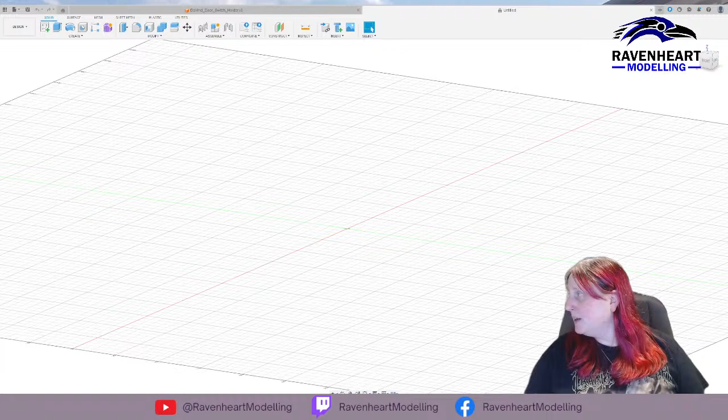What I'm going to do, let me just move a couple of things around on here so I can actually see what's going on. Okay, so yeah, I'm just looking at screen comments and stuff over there, so it's all good.

What I'm going to do is start off by making a drawing. Would help if I use the right controls for the right program. So I'm going to create a sketch on the top axis, and I'm going to start off with drawing basically the outline of this. I've got this set to millimeters, which is helpful.

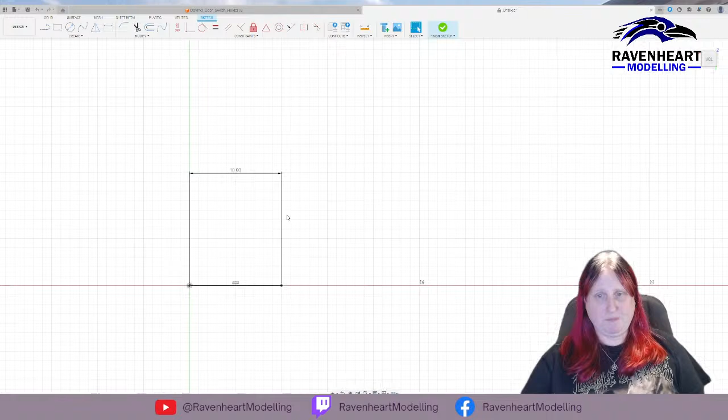So I'm going to start off by doing 10 millimeters that way. So that's that. In fact, I need to - yes, because I'm using this, of course. So I'll go 10 millimeters that way, and then I'm going to go 8 millimeters this way, and then another 15 mil. Okay, and then I'm going to do 20 mil up here.

So this line here is the outline. I'm going to make it 3 mil width. So we go - let's have a look, so we've got 15 mil, it's 2 mil plus that, I'm just double checking my maths. Okay, let's do that, so that will take it out to where it needs to be. Then we've got 15 plus 5 in there. In fact, I need to move this out, don't I? So I'm going to need to move this.

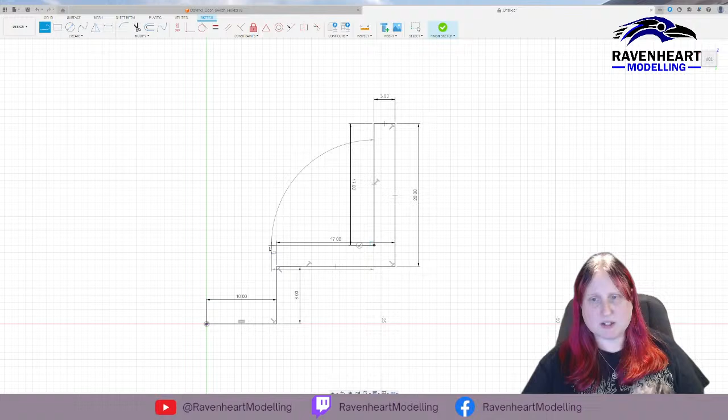There we go, cool. So then I'll bring it out by 3, and then I'll bring that down. That's 20 minus 3, which is 17. And then across here, I'll bring it, so that's going to be 17 as well. And then down here.

Yeah, sorry, didn't I? This is where you get to see all of my mistakes, all my little mistakes going on. So, undo that, undo that, undo that. Okay.

So, need to go this way at 3 now. And then go down here. What is it? No, it's... yeah, no, I know where it is. I had it right the first time.

Right, put that one back in. Have fun, I'll get this right in a minute. So 3 mil this way. I need 17 this way, and then this goes to the end, all 24. Then this goes back down to the bottom.

So that should be 8 plus 3. The 8 plus 3 is the 8 that we're going in plus 3 mil of depth, which we've got all the way around. Okay, that should be okay. So that is for one side.

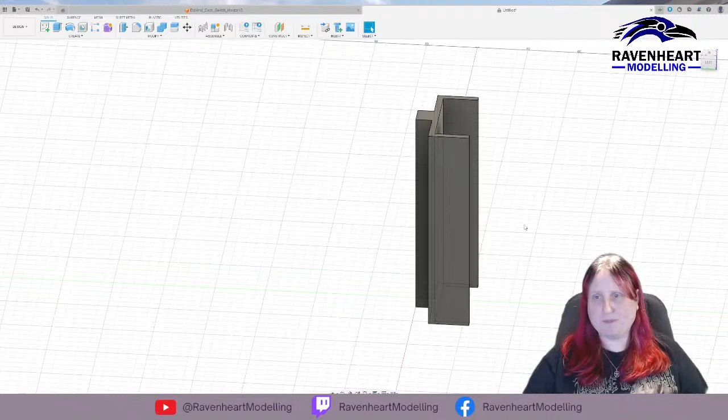And so with this, I'm going to finish this sketch now. I'm going to be able to select both of those and actually extrude them by, let's call it 100 mil. So we've got this now. Actually, 100 is probably a bit too much, let's call it a bit 50 mil.

Okay, so what we've got now is this little thing here that sits in the groove of the trestle at the top, so it sits in a little V. I didn't make it a little V shape because I can so easily get that wrong, and it'll just sit there quite nicely anyway, like this.

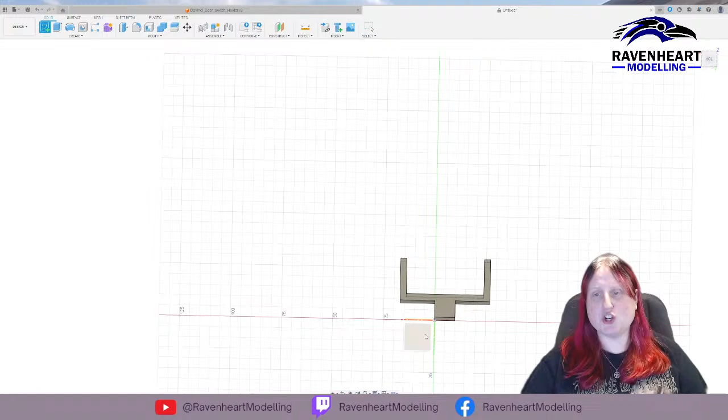So what I've got to do now is, bearing in mind that this is 3 mil thick, I need to create another drawing, another sketch on the same plane. And I need to make this one, because this is the one that's going to go on the side, on the end of the boards, so sort of the end trestles.

I need to take this up by 8, and then I need to take it out by 3. Then I need to take it up by 20. Okay, then I need to take it, yeah, so take it across by 3 and then down by 17.

And then across by 22, and then up by 17, over by 3. Which stopped doing it, there we go. And then we go down by 20, and we go down by 20, and back in there.

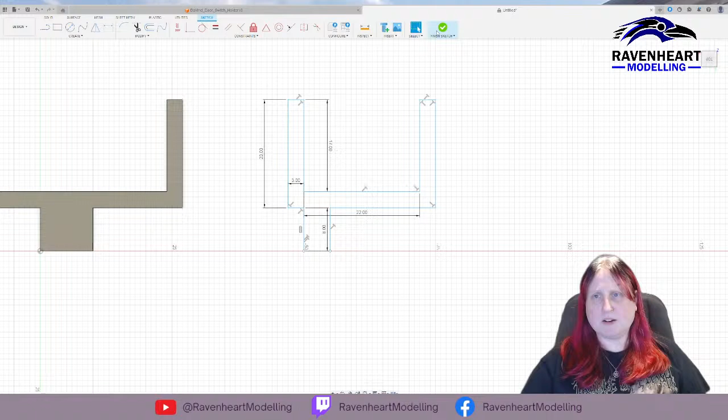That is just a little bit too fast. Right, so this now, if we finish this sketch here, that's now - did we not go across the bottom? We didn't, okay, so just create the one at the bottom, across there. There we go. Finish sketch. Okay, so this sketch now, I'm going to extrude this as well.

I'm going to extrude it by 50. So we've now got both of these built.

What I'm going to do now is, if I look at the left-hand side, I need to create another sketch on this plane, and I'll need to do it about halfway. So I need to create screw holes in these.

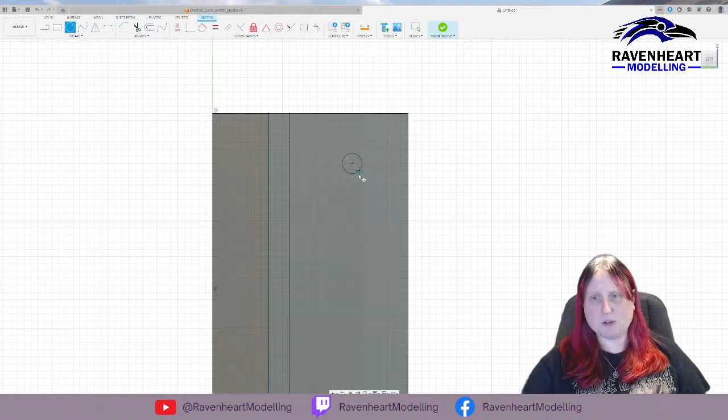I think I'm going to be using M4s. I'm going to create a 4 mil hole here, and I'm going to create another 4 mil hole in the same axis, at 1.5 in. It's there. And I'm going to do 4 mil.

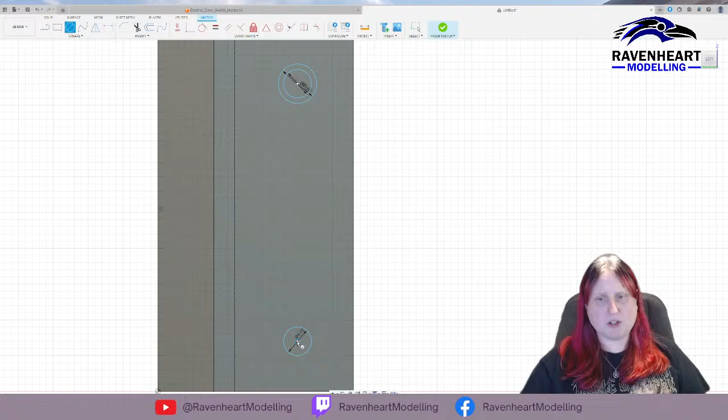Now what I'm going to do as well is create a 5.5 mil circle around each one of those, and we are going to use that to create the countersink.

So first thing we'll do is take this, and we are going to extrude. Finish the sketch, of course, first. We're going to extrude that by minus 200.

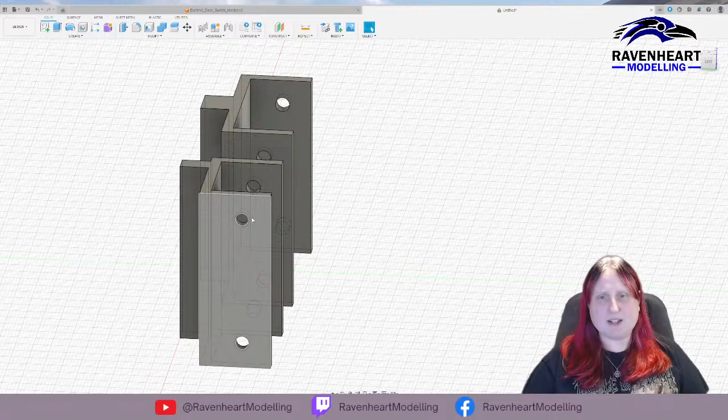So the way that's done now is that's taken holes all the way through, in exactly the same place on every single piece. So what I'm going to do now is go back to this sketch.

Sketch 3, I'm going to unhide that. And I'm going to move that sketch. In fact, no, I'm not going to move the sketch. I'm going to highlight, zoom in a bit, highlight in there, highlight on there.

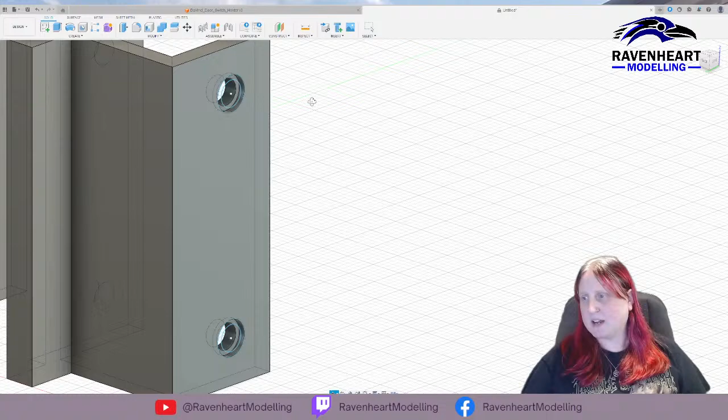And I'm going to do the same, extrude, but only by a very, very small amount. So -1, which is a third of the way through. If I look, yeah, so that's a third of the way through. If I do that now, you'll see that I've now got this countersunk screw head in there, which I can use.

So now I'm going to take this sketch 3, I'm going to move it, and move it over to here, so it's on that plane. In fact, I'll move it back a second. I'm going to move all of sketch 3... I can't move all of sketch 3. That's a shame. And move that and that. So move it. There we go, so we're going to move it over to there.

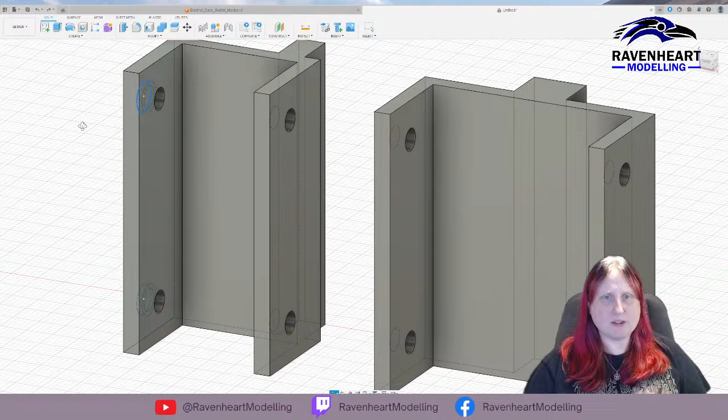Ooh, of course, yes, because it's all linked, isn't it? Right, okay, so I'm going to need to create... I'm going to create a copy. No, that's not going to work either. Aha, this is where I've faced my challenges, you see. So am I going to have to create a new one on each one? Probably. All right, so I'm going to have to do that, I think.

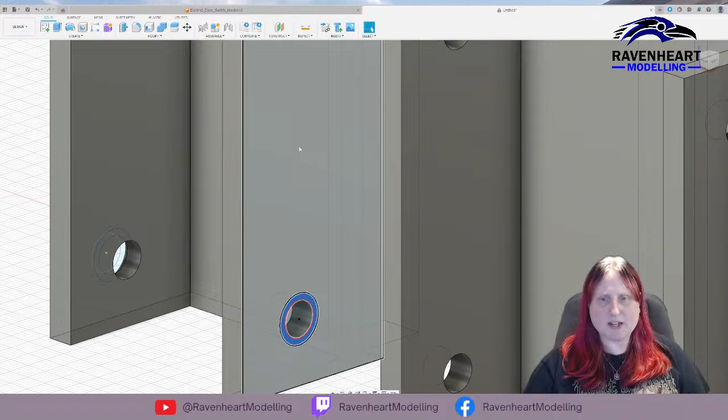So I'm going to do the same. I'm going to do 5.5. I'm going to do 5.5. Okay, finish that sketch. So now I should be able to select that and select that, do an extrude of -1. There we go. Now we've got, yeah, perfect. So we've got those on each face.

So it's sad that I couldn't reuse that sketch on the other side, but never mind, it's there and working now. So I'm gonna have to do the same here. So I'll do that, and do a sketch there out to 5.5, and another sketch out of here to 5.5.

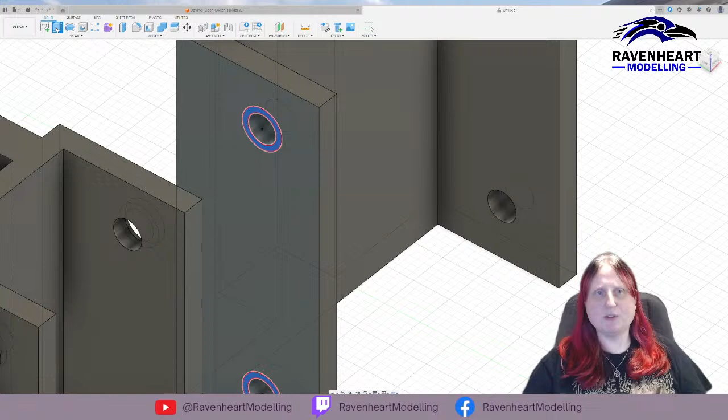Okay, finish that sketch. And we're going to go in there and into there. We're going to extrude that by -1. And the same on the last one.

We're going to create that sketch there. We are going to then create circle, 5.5, and another circle down here of 5.5 now. Finish that sketch, and then you'll be able to select that and select that. Extrude it by -1, and that is that.

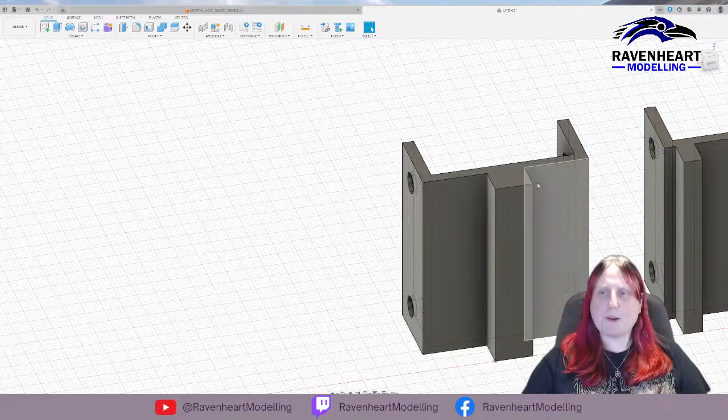So now we've got these. Let's see, that should be fine, that should take us... These are 2 different widths. Why are these 2 different widths? Let's measure them. Do that corner to that corner.

Length... length... 10 mil. 10 mil, okay, so this is what? How big is this? I might need to make this a bit bigger. That's 5 mil. I've made a mistake. I have made a mistake.

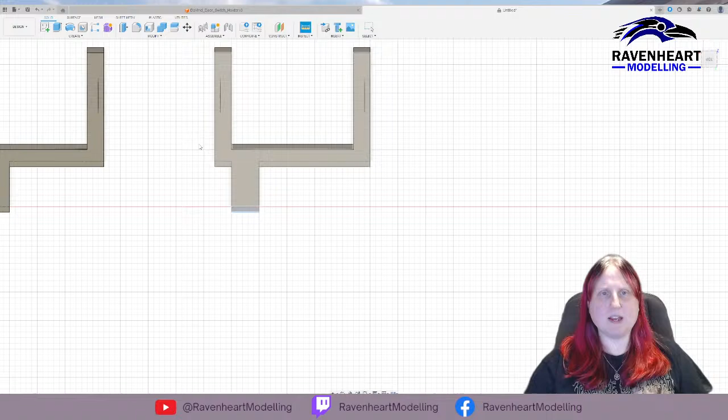Okay, so yes, what I need to do now then is create a new sketch. It needs to be on this side. And what I'll do is create it here. We'll do it up by 5 by 8. There we go, finish that sketch. Extrude it out by 50.

And that's additive, so that adds on to there. So that's that mistake easily fixed. Oops, I'm upside down now. Yeah, so these look fairly good.

One thing I will do is just chamfer these corners slightly to make them a little bit neater. Chamfer them by 2 mil, I think. Yeah, 2 mil, there we go. So those are a bit neater.

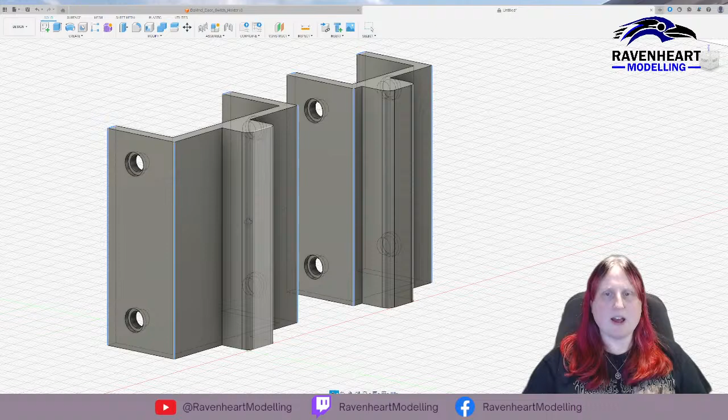The insides need to be as neat as possible. What I'm going to do is... no, not you, you. You and you, you and you, and then underneath I'm going to do you, and I'm going to chamfer you by 1 mil, just to make it.

Oh, hang on, where have you chamfered? I had something selected then that I shouldn't have done. Okay, let's have a look. Let's do this again, I'm going to do it bit by bit. So you and you. Sorry guys, you're going to get a little bit annoyed with me doing this, I think. Let's do it bit by bit, 1 mil chamfer on there.

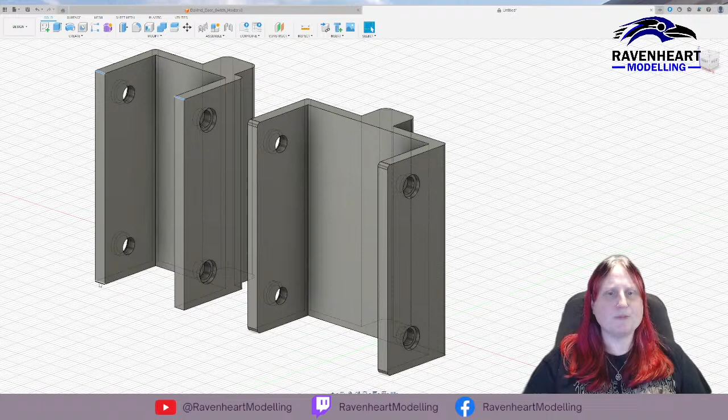2, 3, 4, chamfer by 1 mil. And 2, 1, 2, 3, and 4, do a chamfer of 1 mil on there. Okay, there we go, so that should be fairly good.

That's what I'm going to do now, is I'm going to save that. Save it in my admin project, Trestle support. Okay, I'm going to save that.

So what I'm now going to do is select these bodies in here, save them as a mesh, and export them out. You can't actually see this, which is frustrating, but I'm going to export these out into my file system. I'm going to go to 3D printing and create a new folder, because I'm going to be doing a load of 3D prints from this channel, so it's going to be good. And so, supports.

So this is a double support. And save that one out. Okay, and that's saved. And then this body here, which is that one, I'll save this one as a mesh as well.

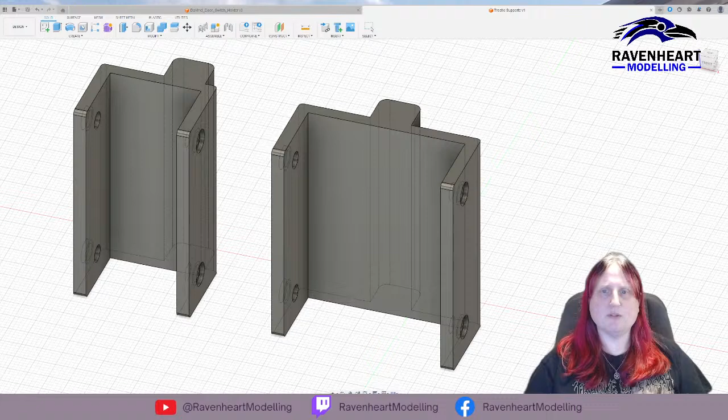And we will save that out. And the other one didn't save, okay. Well, I'll go back to this one and save this one again because it didn't save the first time. All right, and we'll call it double supports, and we'll save that and click save. Okay, so those are all saved.

Now my next challenge is going to be that I need to get these printing. So I'm going to bring in my 3D printing software. I have a DaVinci Pro 3-in-1 version 1.0 printer by XYZ Printing.

Sadly, XYZ Printing have just gone out of business. So I'm using this printer as long as I can, and I will need a new printer at some point. So I will be starting up a Patreon or something like that, just to help me get towards these things, help me build the layout, help me build a new 3D printer.

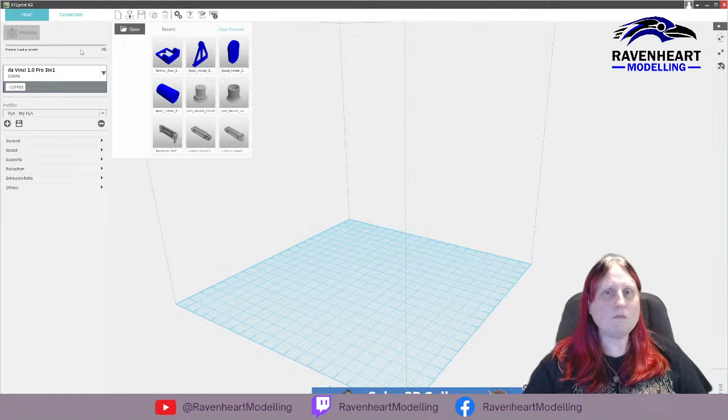So I'm going to load up the double support first. Okay, that's in there. And I'm going to open up single supports.

At the same time, I'm going to only print one of each at this point, and that is because I don't want the issues of printing multiple and then ending up... what is that? Okay, and then ending up none of them fit. So this is basically one of each, proof of concept, and then when they both work, which I'm sure they will do, I will print the rest of them up.

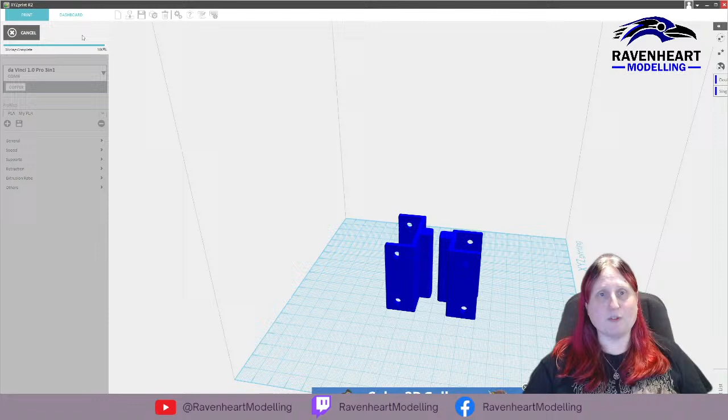So if I check supports on this, I've got supports and bases enabled, so that should be fine. I'm using PLA. So if I prepare this for printing... no printer connected. I want to be using that printer then, please. So these are...

Yeah, so here we have, it's all sliced up. We can see it by layer, go down layer control, and go. So yeah, we've got all the supports in there as well. So let's have a look and see how that prints. So that should be 1 hour, 29 minutes to be printing. So we shall see.

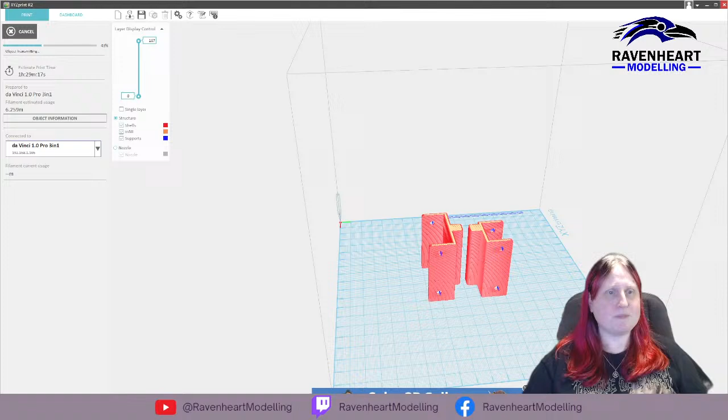If I print that now, we should be able to see those going. Transmitting, and it's receiving from wireless. So let's open up the print cam. There we go. Did that disappear? There we go, that should be it.

Lovely, so the job is transmitting. The job is transmitting to the 3D printer over there with the 3D bed in it. That's quite good, and you should be able to see that start going in a minute when the job has been received. It's up at 75%, 78, 79. So it should be there in a minute. Okay.

I'm watching it, I'm watching it. It's good. You'll get there soon enough.

I need to do something about that cable chain on here as well, because one of the cable chains has snapped, one of the originals, and the cable just dangles down now. So really need to get myself... well, I've got a new cable chain and just need to fit it.

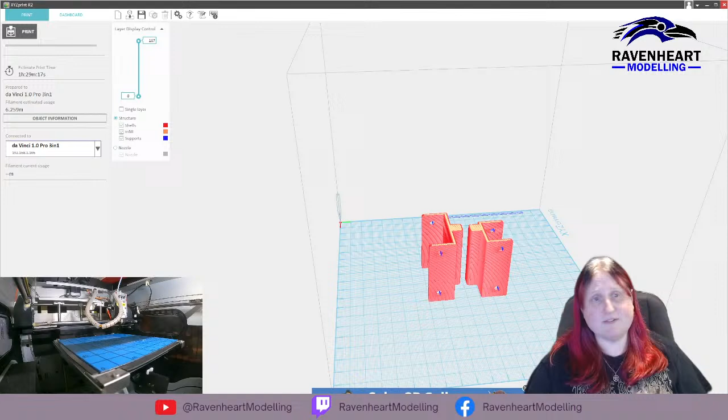Okay, so now that we've got that on the go, I will now switch back to Fusion. So this is one of the things that I needed to get done, so we can watch that printing over in the background there, and I will carry on with the next thing.

So I have saved these. I'm going to new design. Okay, so now I get to the top view on this. I need to now design a paintbrush pot, and I need this.

I mean, this is just exploring kind of the way I'm... guess get the words out, Kate. This is what I'm doing to learn 3D modeling. I mean, I've got a degree in it, but you know, it's just one of the things, isn't it? Right, so...

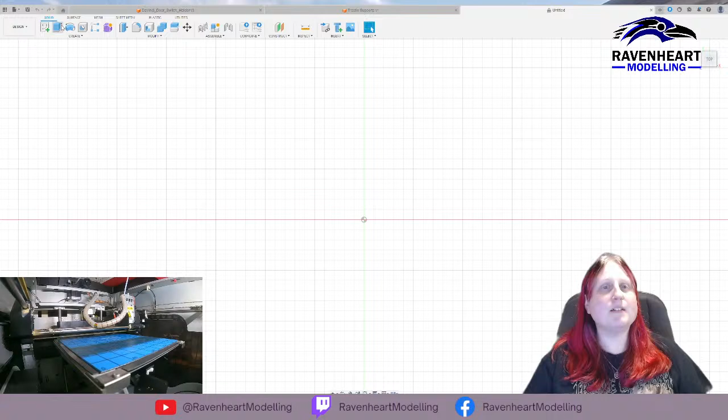Okay, brain, now I need to be looking at how I do this in the sketch. So we don't need to open up a sketch. So a paint pot, paintbrush holder, I'm going to go for a round one.

Now let's have a look at 15 mil. I've got a tape measure on there. I don't. Okay, so I look at the size of a cup, for example. So my cup is 90 mil in diameter. So if I make that 90.

Okay, and so I need to also make, how thick am I going to make the walls? I need to make them a centimeter thick, so I'll call that 80. Let's call that 80. Okie dokie.

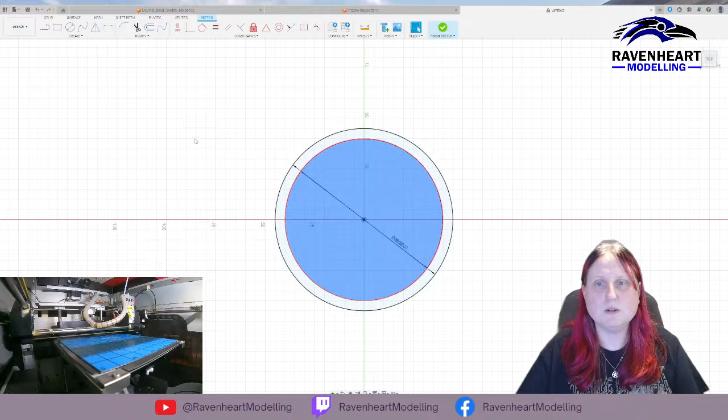So what I'm going to do is finish that as a sketch. Then if I extrude this by 10, go bring back that sketch again, and I'm going to extrude this by 20. We've got a basic pot there.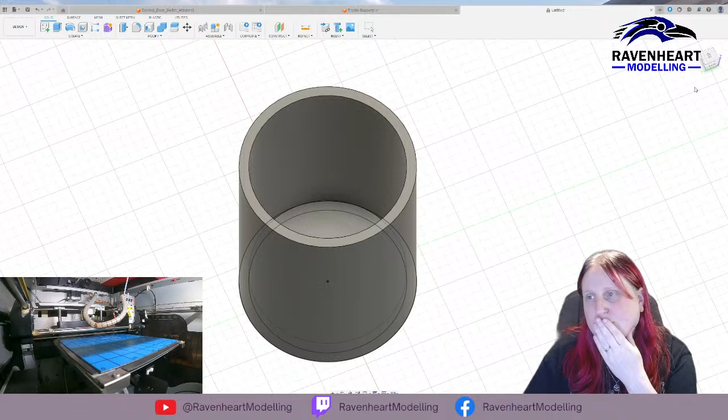Very, very basic pot. Now what I want to do, if I'm... see, I need to figure out how to scale this now. So if I scale, but I just want... that's just scaling the whole entity. So,

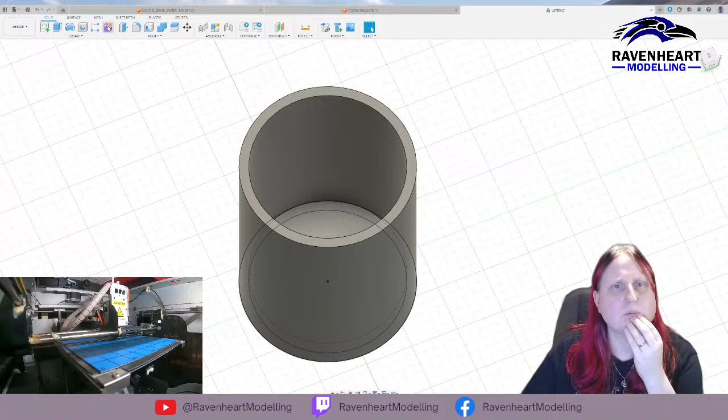Edit profile sketch. No, sketch. That's that. So I'm learning here, I'm learning. Edit feature. Okay, feature is the extrude. Press pull, no, that's basically the same as extruding. Fold, no, fold, no. Okay, form. No.

Face. Yes. No. No. No. So that's not that. Okay, interesting.

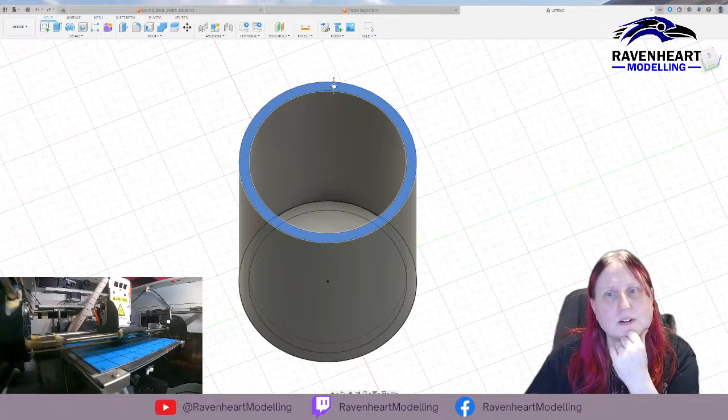Oh, I wonder if offset face will work. That will not work. What about if I choose the outside? And I offset that. What if I select this? And if I...

Simplify, no, I don't want to simplify, I want to scale that. That will only let me select a body or an entity. Interesting. So what I want to do is I want it to flare outwards at the top. So if I was working with a mesh, I'd be scaling that mesh, but it would only be that edge that I was scaling. So

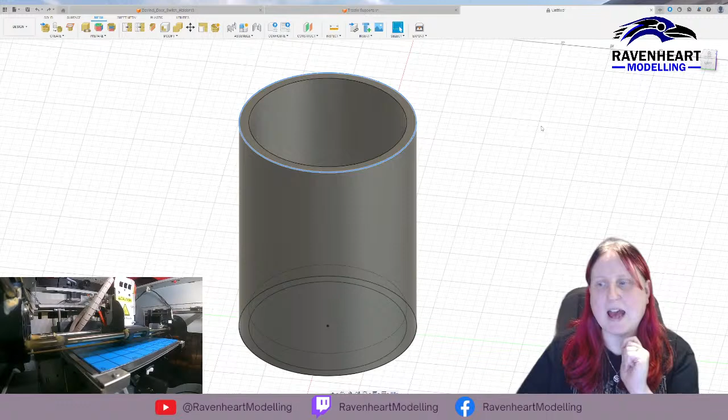Sadly, they don't do that in CAD software. That's not the way that it works. And we can't split the body, or we don't want to split the body or the face. Interesting.

Loft will actually do that, which is cool - very cool, but it's not what I want to do. Because if I do that, okay, so revolve on... no. Right.

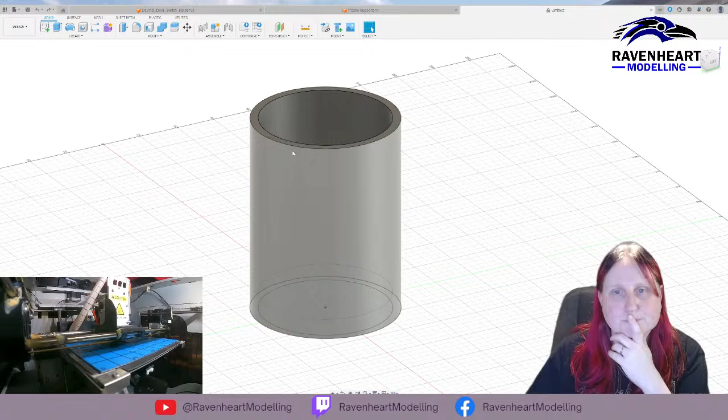So we will copy faces. Yes, that face, we want to scale that face. Free move, translate, rotate, point to point, position. Yeah, but that's... it's not what we want, right? That's to scale. Okay.

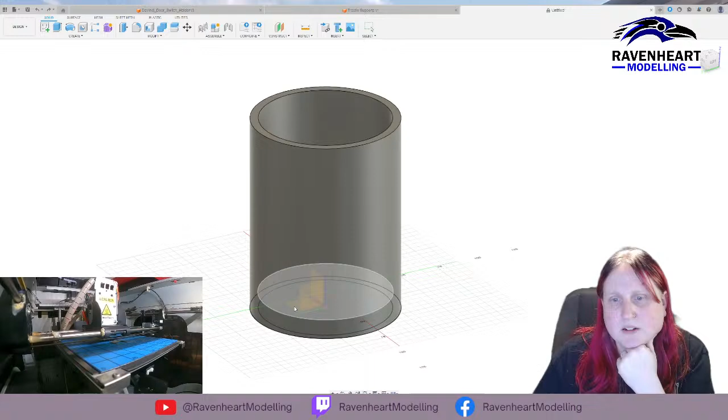So same can do. We can press pull, redo whole sketch. Offset. Okay. 3D sketch, finish sketch. No. Oh. Okay.

So what I need to do really is create another - I wonder if there's a way to create another sketch on this angle. I can create another sketch there. Refine. That. Finish that sketch, then I do that.

Create. Over to that. Okay, type single - right, that's a path. So the sweep needs a path and an object, and that's not working. So create.

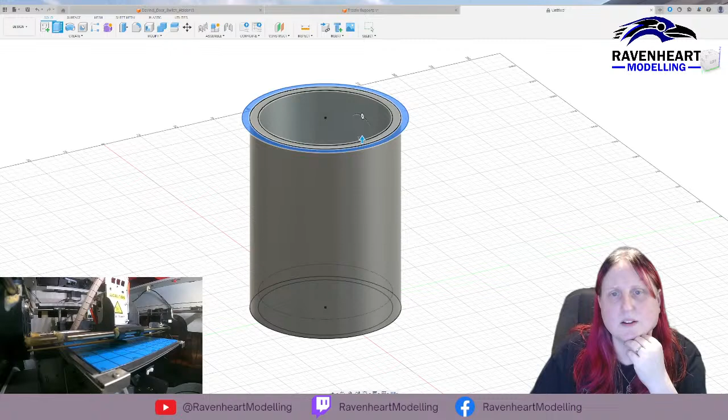Let's create. Where's press pull, works down to... how do we do this? And this is a very, very basic one. I should be able to do this, right? And yet I thought... and here then, and see. That's a... so one face of the body, that's what I need to do.

Draft angle tool, probably. Okay, so draft angle, let's have a look and see. Modify draft. Pull direction, basic, one selected. Right. Select, let's do that, repeat draft. Tangent chain, do it on that. There we go, that's better.

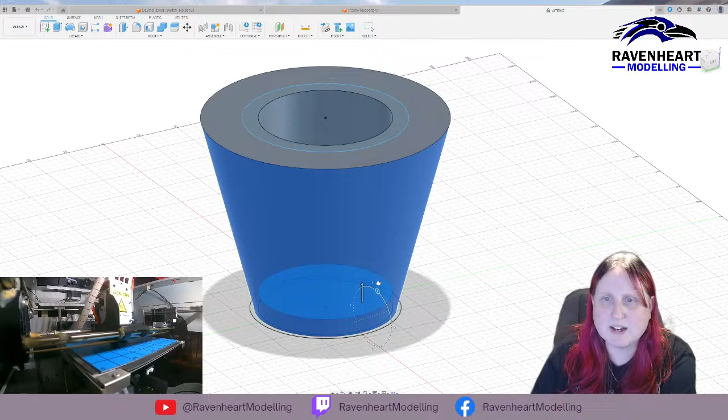-3 degrees, there we go, that's better. That's better. So now we've got this slightly chamfered part. Better. See, learning stuff.

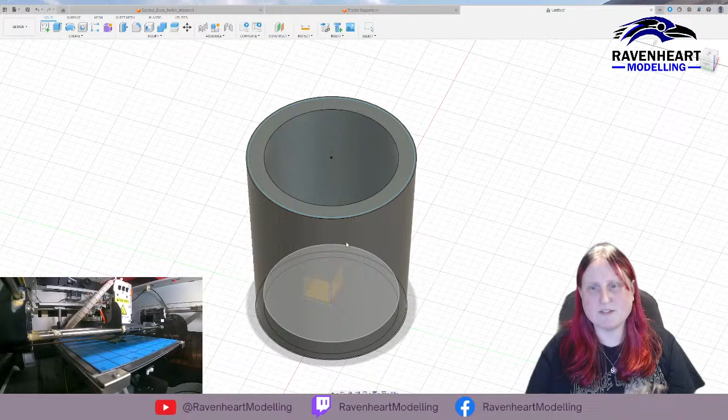What I'm going to do here as well, I'm going to pull this up by 1, so it creates this little lip on the side. And that should be good.

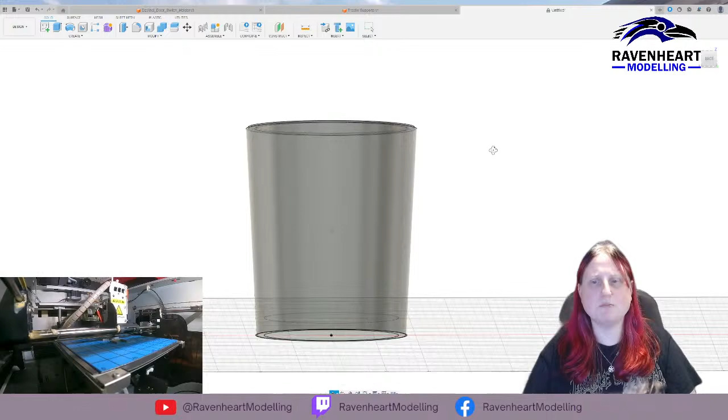Next thing I want to do is I will create another body, because that's going to be my main part. In fact, I'm going to create this new sketch, because I want to be able to segregate this part into several sections. I need to do this more scientifically.

So there we go, I'll create a sketch there. I need to add... no, I need to go 2 mil. Yeah, everything. Yes, there we go, so 2 by 18. There we go.

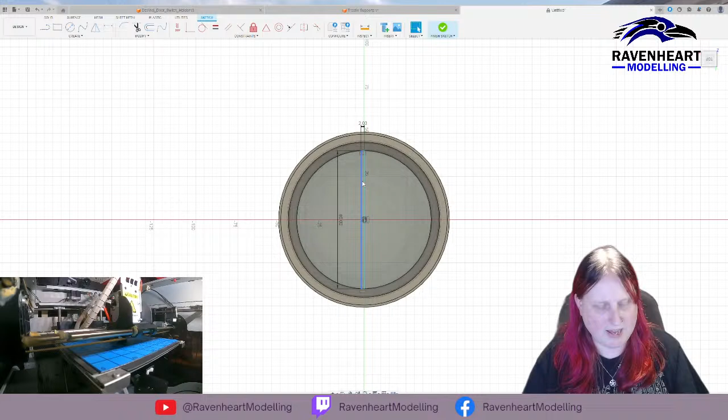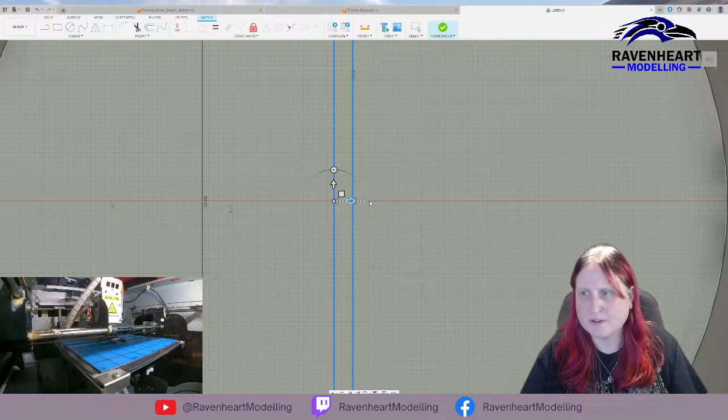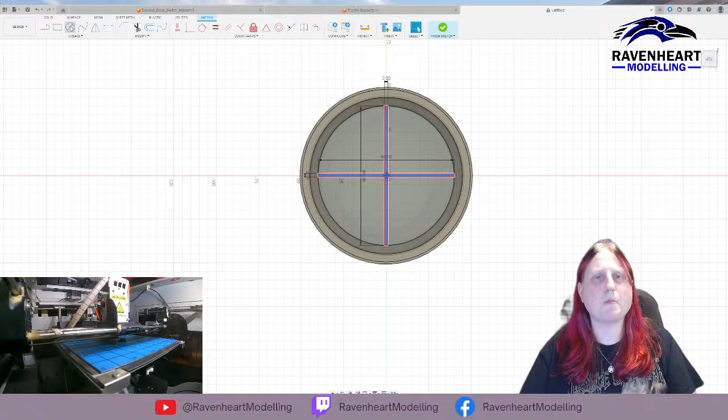If I select all of these and extrude them... in fact, yeah, I have to do it that way, aren't I? Now what I'm going to have to do is finish that sketch, get on to this one. So that's in the bottom, this one is in the top.

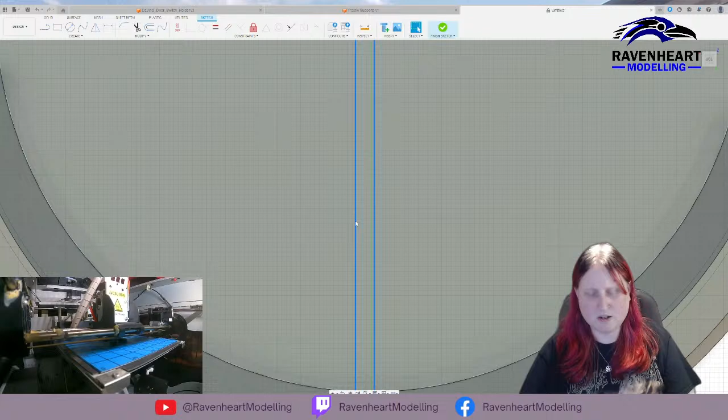Do another sketch, same thing, so I'll do it from the outside line to the outside line. Now I'm going to do it 2 mil because I want it to be the same as it was previously. So do that, move that across there, 6. Go. And then this one, which will be there, and all the way across to there, 90, and there we go. That's good. Right, finish that sketch.

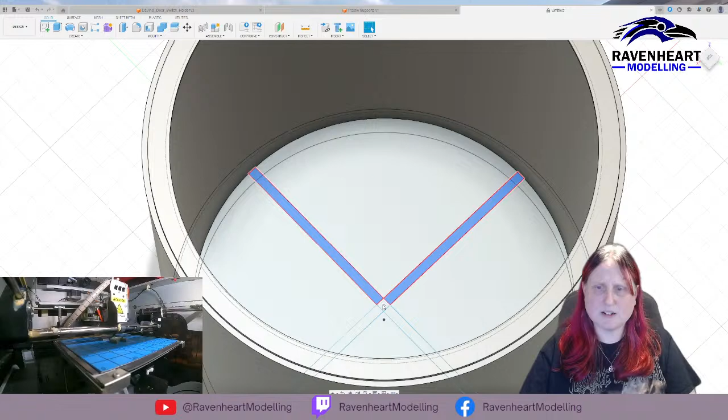Now, if I've now got 10, so I've got to go hide sketch 4 for a second. That, and open sketch 4, and then that, and that - I should be able to do what I just did, which is loft. Should be able to do new body. Yeah, I think I need to do it one by one.

Okay, so if I do hide sketch 4 for a second, get there to there. Let's create a loft like that. Perfect. Okay.

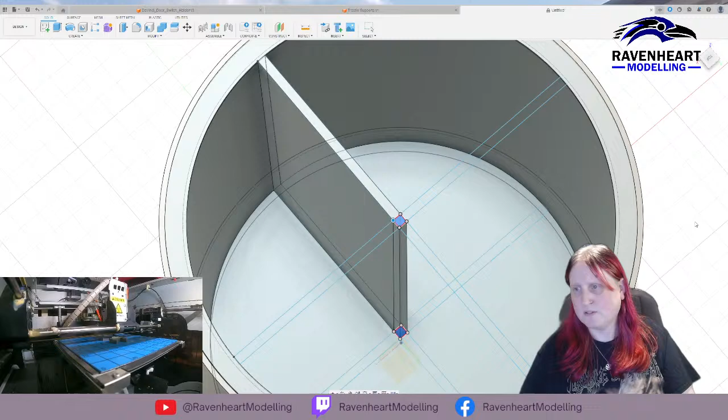Now, do that. And I create a loft between there. Good, excellent. Right, so if I do that, and that, we're going to loft those as well. Cool.

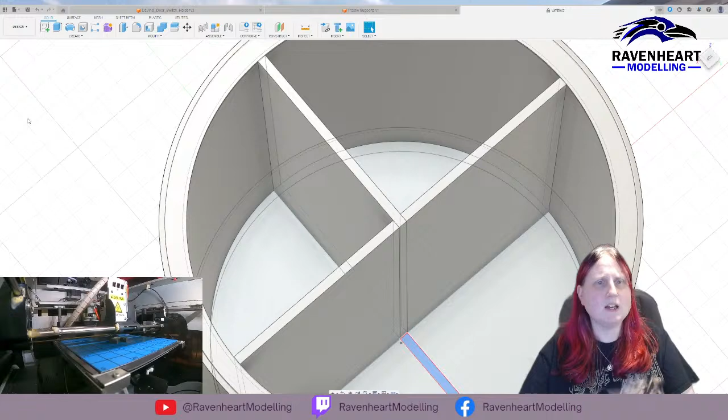And if... yeah, so sketch 4, I'll do that. Show sketch 4, that, but join those. Don't you need... where's my loft tool gone? There it is. Okay, and last but not least, take that one and take that one, and we are going to loft that. Okay, to a new body.

Good, okay, so now that we've done that, we've got a pot that's got 4 sections in it. That'll be good. Now, what I need to do is see if I can create a... I need to see if I can create a little one, don't I? I do. That should be good enough, that should be good enough for now. So I've got 4 segments from the paintbrushes.

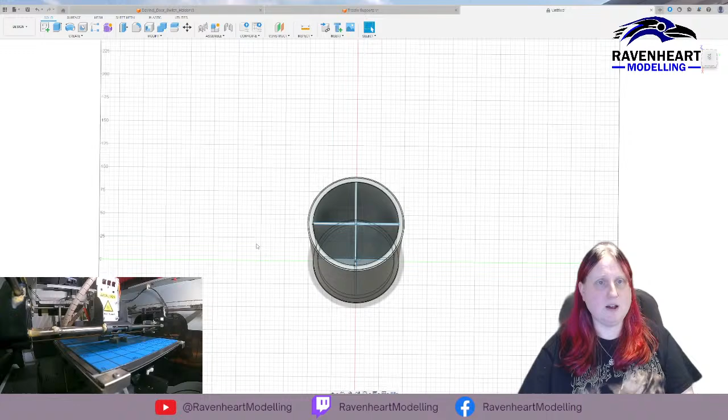Now, knowing that that is what it is, what I want to do is create some little add-on stuff - and that, I know that makes no sense. Add-on stuff, so I want a little water pot that goes on the side, and I want some little mixing pots. So let's see, what are we doing here?

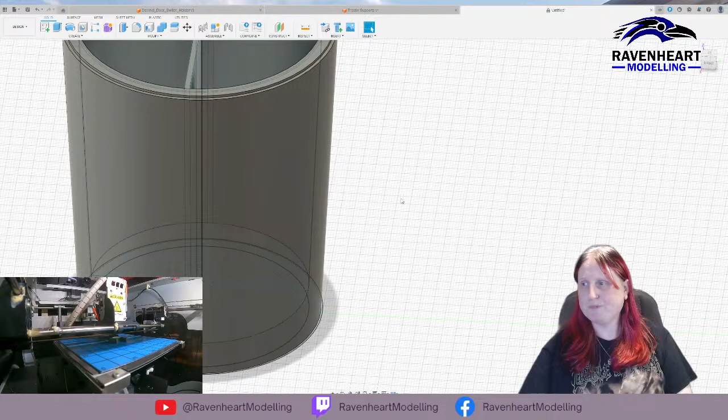So if I create a side profile... yes, that's what I'll do, I'll create a side profile. We're going... no, that's the wrong one. And sketch - sketch I can go do one because I didn't need to do that.

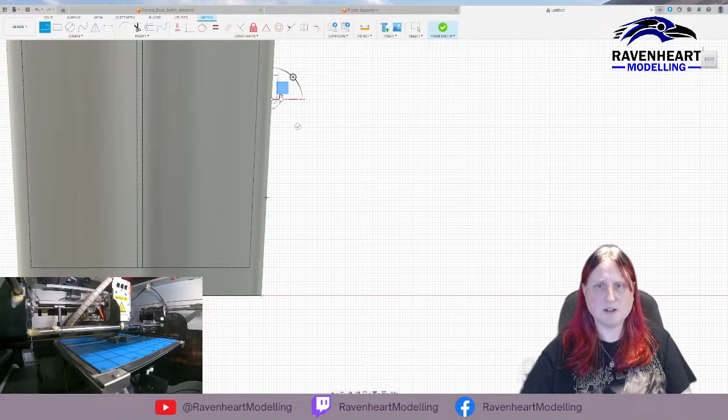What I will do is I'm going to do a sketch on that plane. Okay, that's good. So now I'm going to go up here, up here. And then do probably 2 mil. That's 90 degrees. No, 2 mil, 2.

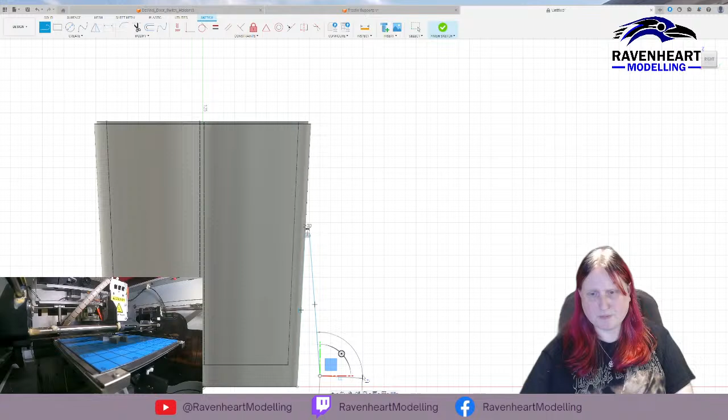We'll turn snapping back on again because that's that. Go to, and go back up to here. Right, no, we won't. We will go down to here and then down to there, and that makes an entire sketch. So, what we're going to do then, now we've got the sketch finished...

I'm going to use this. I'm going to create a revolution into a body. We're going to do it around. Excuse me, that's not what I wanted to do. So let's do that. So that's the sketch. Yes, we're going to revolve it around that axis. And so...

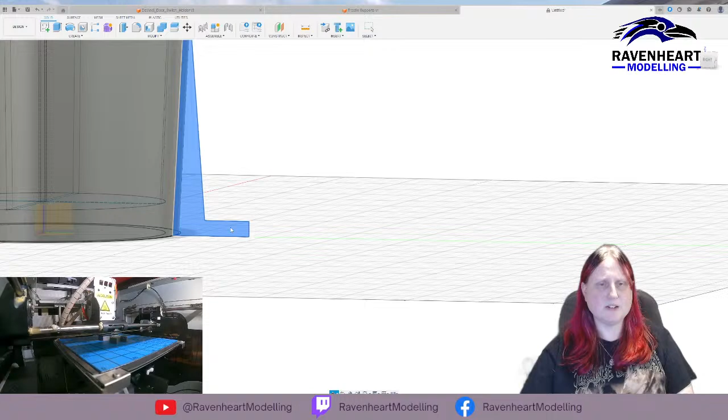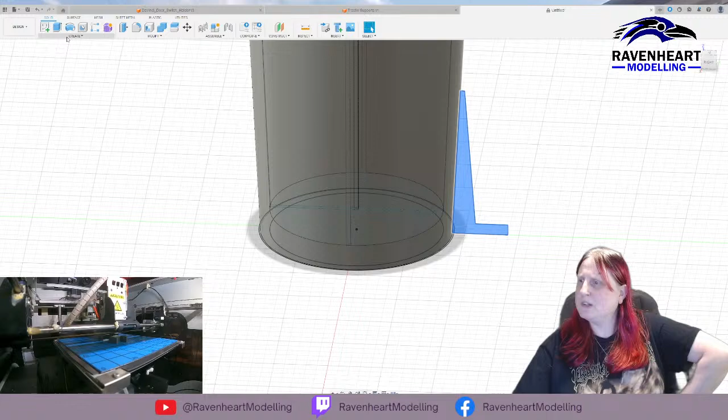See if I can- no, I can't, because that body's in the way. Let's go that axis. And we do it. How do we do that? First, that we do want it to go up that, and we want it to go on the Z axis. Got it, and do that, but what we want to do...

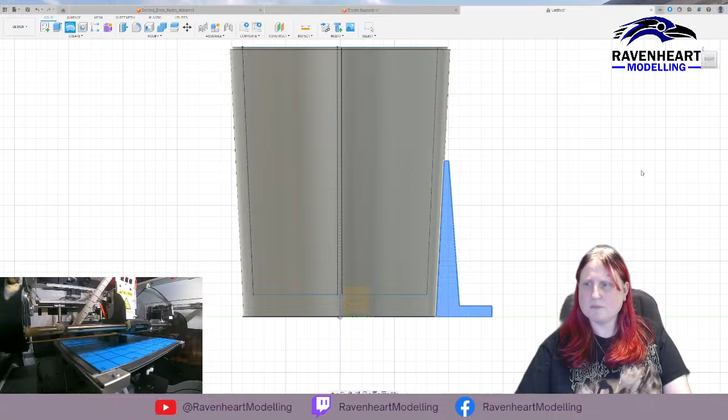There we go. So that's created my new part. There it goes. But what I want to do is I'm going to extrude that, both arms, do it symmetrically to a cut. I'm going to do it by...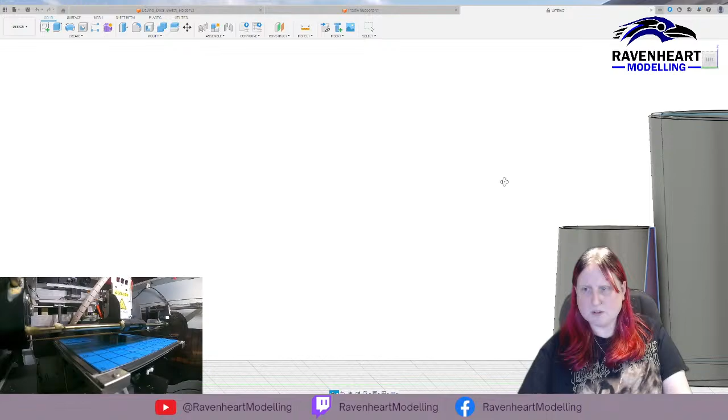Right now, I'm going to break two. I can't do that, can I? No, I can't do that, because that will cut out some of the pot that I've just created.

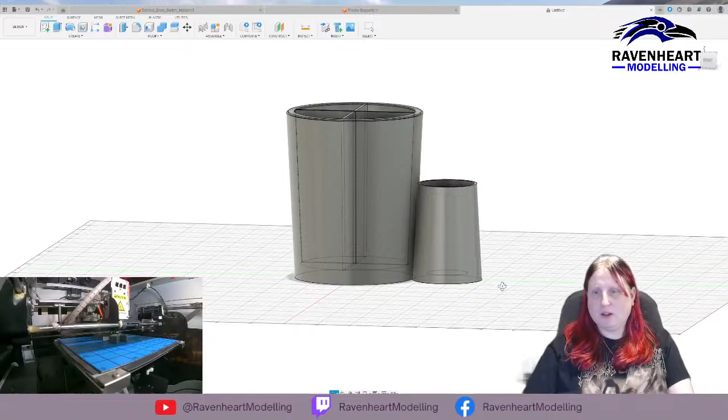So, okay, right, let's hide all sketches. Okay, so we've got some pots there. A pot anyway. I was hoping to join the two together. I'm not sure how I'm going to do that now. Might do it another way.

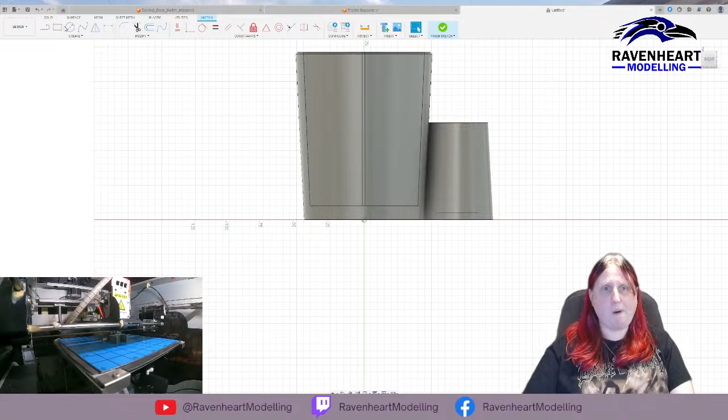Need to do as well. I do that. I do a sketch in pen. Do 10. Do that. That. That.

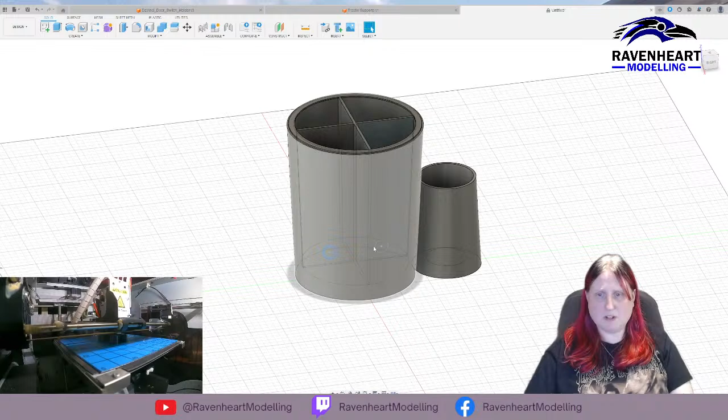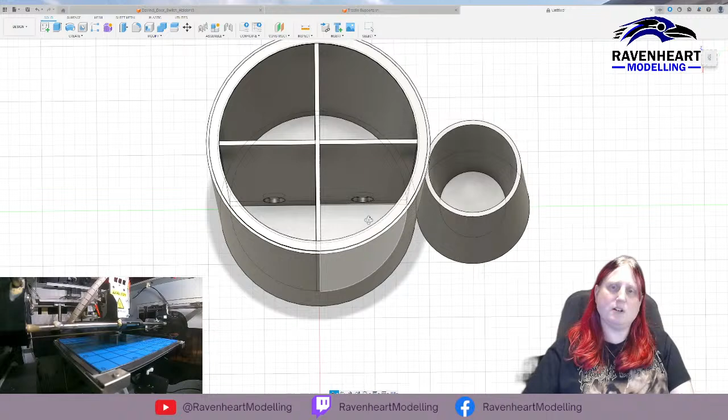Oh, no. Minus 2 should take us all the way through. Yes, and there we go. So then if we've got some kind of paint overspill in there, it will draw into those two. On to the same with those.

Let's do a sketch and do. Yeah, we can. Copy and paste - it's even in a 3D application, copy and paste is absolutely well said. Right, so that one, see, we finish that sketch. You...

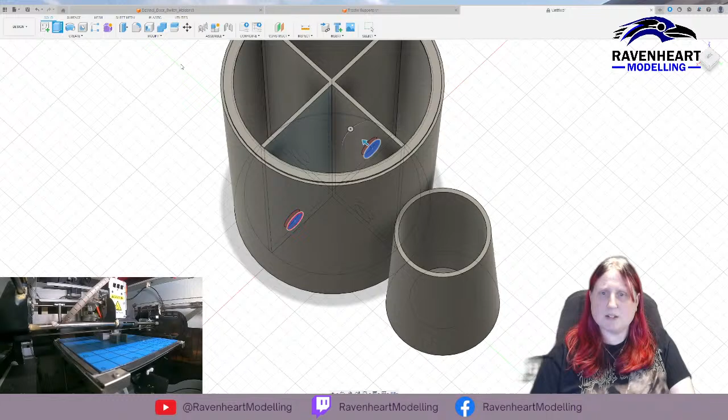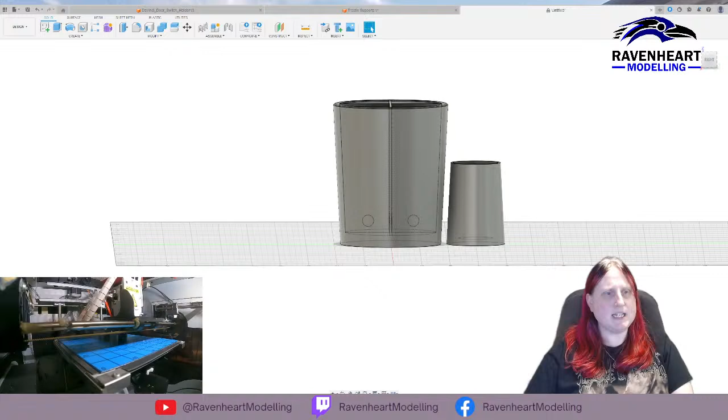There. I can, I wonder if I can emboss my logo. Let's have a look and see. I think so. I just tried dragging and dropping my... oh, actually. What's SVG?

Have a look, can't we? Let's see, insert from my computer. And find it. Yes, that's an SVG, it's good.

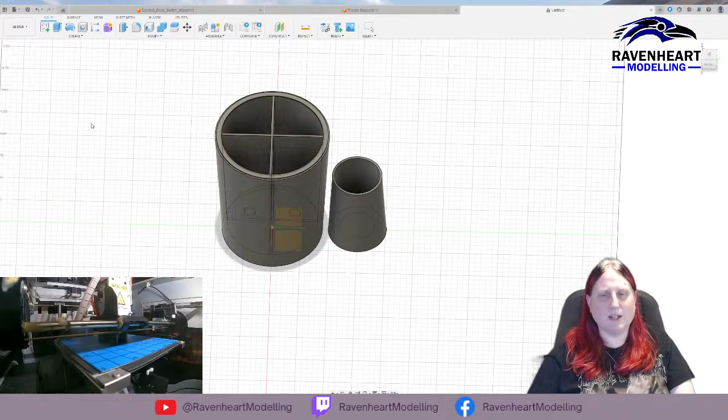Sketch plane. And this would be a flat plane - it can't be on a curved plane. Okay. Okay, interesting.

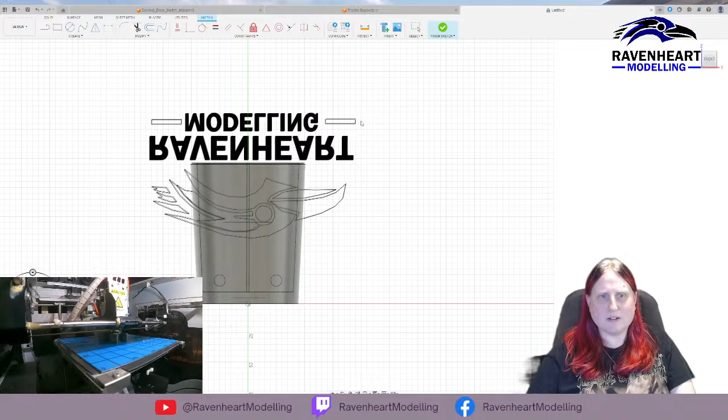Right, so that was a little side track, side project.

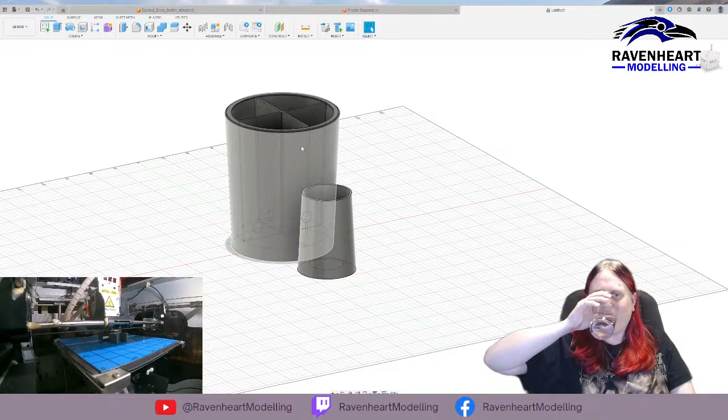So, you might ask, why am I doing this myself? Why am I not just going out and buying a paint pot and a water pot? I think the answer is because I can do this, because I've got a 3D printer, because I've got 3D skills, and I want to do it.

You'll probably see this featured if I get it printed in time. Let's see. There's about an hour left on this 3D print over here. So I will have to put this on to print afterwards, but that should be absolutely fine. So when that's printed, I should be able to have that on my next stream, or my next video, which will be the US Discovery Part 2.